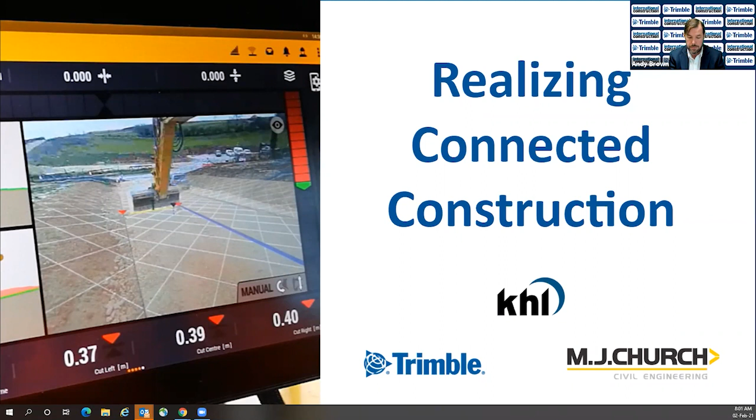Great. Thanks, Cam. And we also have Sam Williams, who's an engineering surveyor for MJ Church. They're a contractor based in the UK, and they've set out to transform civil workflows with technologies to connect the office with the work in the field. Sam, thank you for your time. Are you well? I'm well, thank you, Andy. Thank you very much for having us here. Really keen to share our knowledge.

Great. Well, thank you. We're very lucky to have two very good speakers, and we do have a presentation which we will run through. But before that, I've just got a couple of quick questions for Cameron and for Sam. So my first question is for Cam. We're going to be talking about different technologies today, but one of the main ones is machine control. There'll be people watching this webinar at different technical knowledge levels, so could you give us a quick definition of machine control and perhaps how it's evolved over the last few years?

Yeah, sure. It's quite important to do so because a lot of people are not exposed to machine control and they don't know what it is. So at the simplest form, machine control uses various sensing and positioning sensors and a display to provide the operator in the machine with a reference from where, say, the bucket or the blade is to a target grade. And that target grade could be a 3D model or a design, or it could be as simple as a distance from the bucket or blade to a known bench point or hub, or it could be a distance

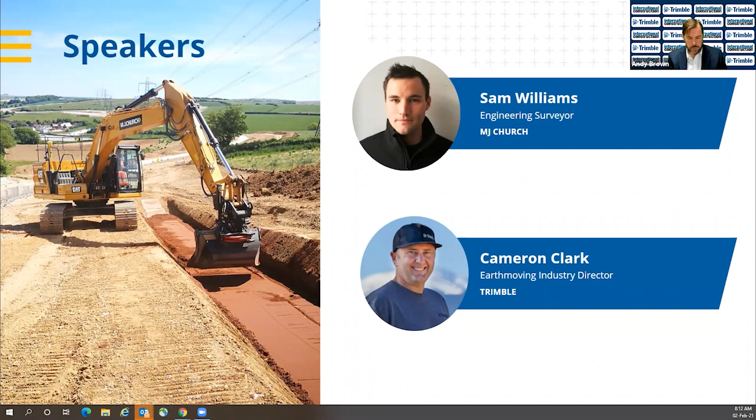Okay, that's really interesting. Thank you. Okay, so I'll hand over to you now, Cam, quickly. I know you've got some slides to go through. Yeah, sure. So yeah, welcome again, everybody.

I wanted to start this session off by acknowledging some of the key fundamental changes in construction that we've seen over the last 20 plus years. We've seen a great continuous improvement process from stakes and string lines, having to eyeball between the stakes. Then lasers came along and you didn't need to eyeball anymore. We've gone from indicate guidance to automatics, being able to do automatics off lasers and trace automatics off a string line or an existing pass.

Then we've gone to 3D where you don't need stakes anymore. You don't have to worry about machines running them over, and you can get guidance wherever you are. You've got all the information in the machine and we can control the machine to complex surfaces. But we've also seen the connection between the office and the field.

And we've gone from really hard to set up radio networks, I mean crazy hard, just to do simple things like file transfer. I remember years ago, 15 plus years, doing FTP file transfer off a command line, just testing, and the pain it was to set things up. But now we've got a lot better connectivity.

We've gone from no cell phone coverage to very patchy to things now being easier, quicker, with more reliable solutions. Some areas are still bad, but when you look at how far it's come, it's dramatically changed over the decades. This has really enabled the construction industry to leverage site connectivity for the flow of information and to strive to improve efficiency and productivity while minimizing waste and cost at every stage of the project.

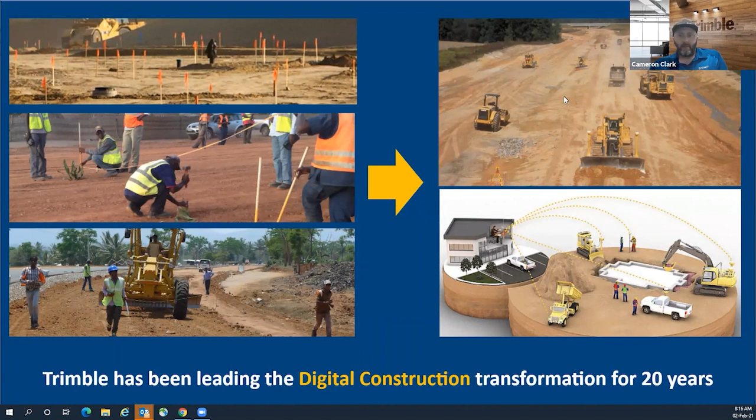Okay, well, I'll jump to the next slide if that's good, Andy. So touching on your question as well, even with the major developments and what I showed earlier, the construction industry isn't achieving the possible gains. And with that, costs are up nearly 5%. That was reported in 2019 in the US. And they're steadily increasing due to labor shortages, as well as the increasing price of materials. And in the construction industry, we've failed to see some of these technologies being adopted like in other industries, primarily driven by some of those mindset changes that I've talked about.

And when you look at it, about 30% of work performed in construction is rework. This can be caused by factors like lack of supervision, insufficient information, limited resources, failed communication, and one that we're going to touch on a lot today is disjointed activities, where the same data or models are not used throughout the job, and these drive an immense cost.

As well, in the US alone, with the 2008 financial crisis, about 1.5 million jobs were lost in construction, and a lot of these never returned. When you compound that with an aging workforce that's retiring, as well as a lack of a holistic apprenticeship program, there's a brain drain that's really hard to recover from. So it's not only a supply and demand issue, but it's also forcing increased labor wages that risk project profitability. But it's not all doom and gloom, and today we want to highlight how things can change and come together when we connect these workflows, and you as a contractor can really realize these in connected construction.

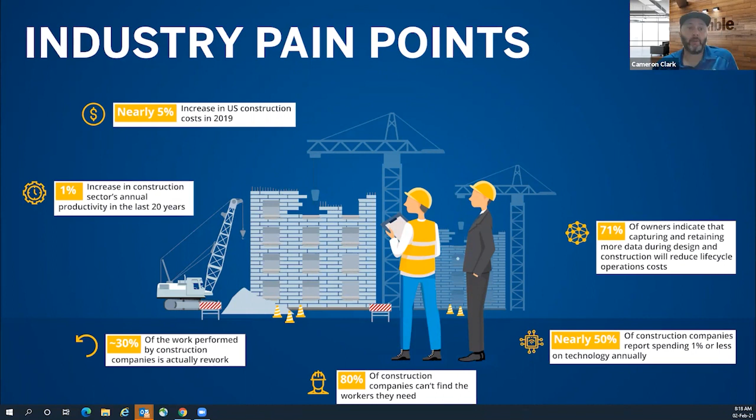And how often have you heard of contractors coming into a job and finding something's wrong? A lot of times they're finding it once they actually start cutting dirt or moving material. Maybe the elevation's wrong or the utilities are in the way. Sometimes you can start and do a workaround. Other times you're stuck and you've got to wait for a design change. But if you can visualize data and all aspects of the project beforehand, using the same models and data, your ability to change is very high, quickly and easily, with as minimal cost as you can.

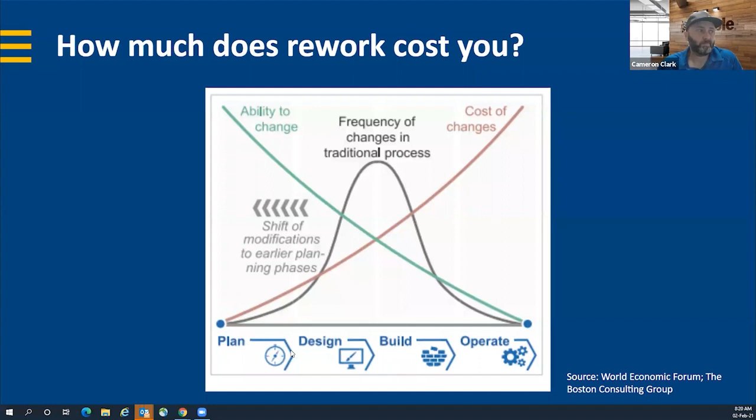So when you look at Trimble and how we've evolved, we've gone from point solutions focusing on areas of GPS, then other positioning sources, to dramatically improve productivity. But the key area of focus now is integrated work processes. It's an ecosystem solution for the whole value chain or life cycle. Our mission is to transform the way the world works, and our vision is to connect the digital and the physical worlds, in order to allow customers to deliver with confidence.

So to do this, you need to connect all the processes and task management through all the different personas on the construction site and through the whole chain, as well as both the vertical and horizontal civil construction processes. And this really drives quality, productivity, transparency, safety, and sustainability.

And Trimble is unique where we offer solutions that integrate throughout the whole construction life cycle. Couple that with the support of our construction technology distributor network of SITECH, and we've got your needs covered. And really today we wanted to highlight with Sam from MJ Church, and he's going to go into specifics about the value that they see with connected construction and how they realize this value.

And Sam will be touching on real life examples for the model creation, design, management, and office to field workflows, remote monitoring, support, and training, and then also the real-time capture of field data and the benefits of that data coming back to the office automatically. And then also not having to send surveyors out to do as-builts, being able to do stuff like that with the machines directly and from information that they can capture.

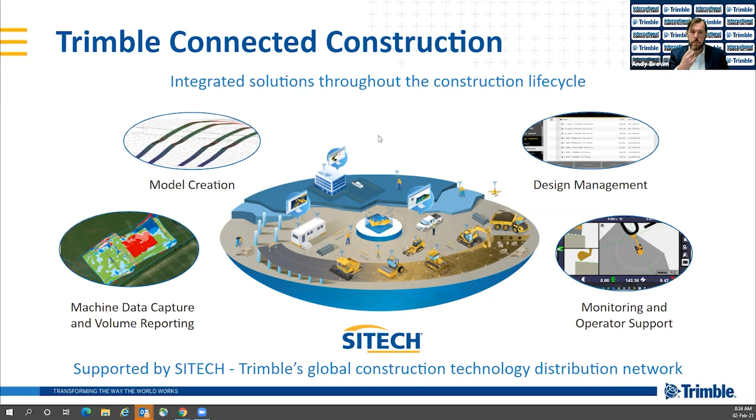Okay, do you want to go into the next slide? Yep. Can do. So this is where I jump in and give a real world experience of what I think is fair to say is sort of realizing Trimble's vision. I think one of our goals as a team from the beginning was to, as much as practical, realize the vision of a connected site and all the technologies that encompasses, and to see what we can do with it, really. Being interested in technology, it's always fascinating to see how we can use things in a different way, or try and use our existing equipment in a more optimized workflow.

So I've tried to frame this presentation around one of our example projects. It's acting as sort of a proving ground of all of this machine control technology and this fully connected real life site. The lessons we've learned there and the knowledge that we've gained there, now a year and a half on, are trickling down into all of our other sites across the country, really. And the technology that we've developed here will be moving forward into all of our future projects as best we can. We're investing heavily still in machine control and the technology that comes along with it.

So the Dorset Visual Impact Provision is a project in the southwest of England, in the United Kingdom. MJ Church are working on behalf of Morgan Sindall and National Grid.

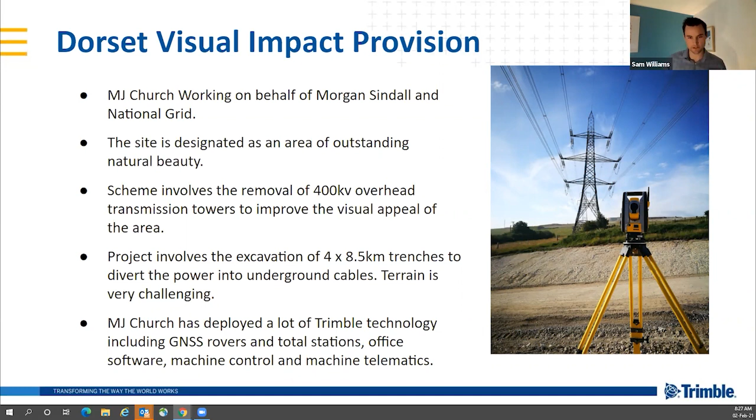So 3D model creation, this is what saps quite a bit of my time, but it's one of the areas that I'm particularly interested in and have become fairly skilled in over the years. So we use Trimble Business Center, which, if you do nothing else after this webinar, go away and just look at how you might want to use it or get a trial of it, because it is, for me, the one-stop shop of modeling softwares. There's not much it can't do. It does some amazing stuff, and they're constantly improving it. Instead of having a fragmented approach, which you might find with other providers, pretty much everything is bolted into the one suite. There's little add-ons here and there, depending on your workflow. But it is an amazing tool.

So the designer on this particular project has provided us with fairly limited 2D detail, which isn't particularly useful when you've got a machine control fleet that needs a 3D model to dig to. So they provided us this information in a variety of different formats, PDFs, 2D DXFs, all sorts of other industry formats. TBC can import all of that data, we can manipulate it, we can elevate 2D data to 3D, and do all sorts of modeling on it, and then push that to the field for construction. So on this particular project, we've been using Trimble Business Center to create corridor models effectively.

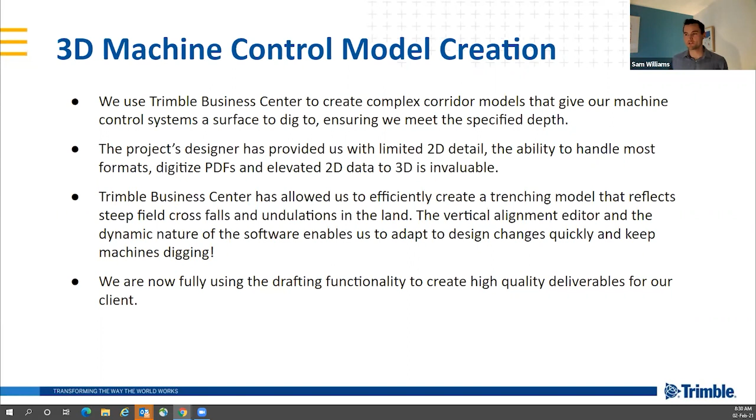And we can use powerful cut fill maps to optimize the levels as much as possible to get us into where we need to be in terms of the depth. And then once we've done that optimization, we can put together some high quality PDF deliverables to send to our client for approval or for design review purposes.

And the tools that are in here have already highlighted a number of issues before we got there. It was by doing this analysis or the design on a couple of the first sections that we identified a major issue between field transitions. That realization was then fed back to the design team, who have since redesigned much of the scheme to reflect the new topographical data. That realization came first within TBC.

If we could just skip to the next one, please, Cam.

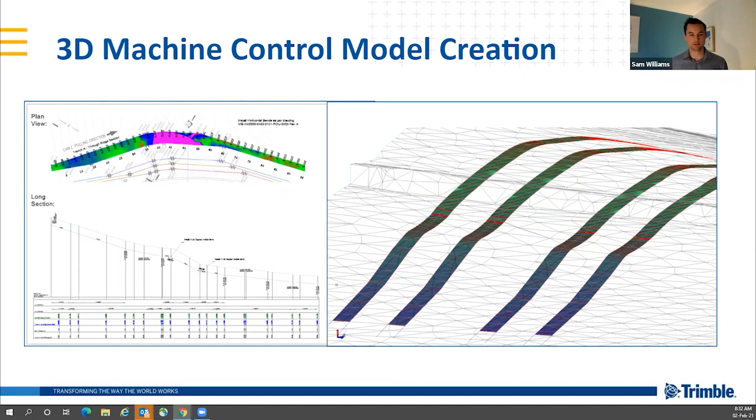So once we've created these designs in Trimble Business Centre, once they've been approved and the project team are happy with them, and I'm happy that they've met the design specification, we need to push that data to the field. Now, traditionally that's done with a USB stick.

So you plug a USB stick into your laptop, you drive down the M5 2 hours south from here, and then you run between machines for the day, you stick the USB in and you download it, and then you run through all 10 machines or 8 machines that are down there, and then you drive back up and you get a phone call and the design needs to change. For whatever reason, they've encountered a service or something's changed, and then the process starts all over again, drive back down. Obviously a complete waste of everyone's time.

So we use a cloud-based management solution called Trimble Connected Community, or soon to be Works Manager for us. Now this is live on the internet. I can push designs directly from Trimble Business Centre to the cloud. Those designs are then pushed to the field, to every machine we have in the field with a SIM card that's on 4G network. They can be there within 15 minutes.

The machines probe the server every 15 minutes to see if anything's changed. The driver, if they want to, can initiate a manual sync. So it's almost instant. It's as fast as the cell network can deliver that data. So if we encounter a service or if there's a design change, I can very quickly react to changes or requests for changes, push that data to the field, and I can know from the comfort and safety of the office that every machine on that site will be updated with the latest data.

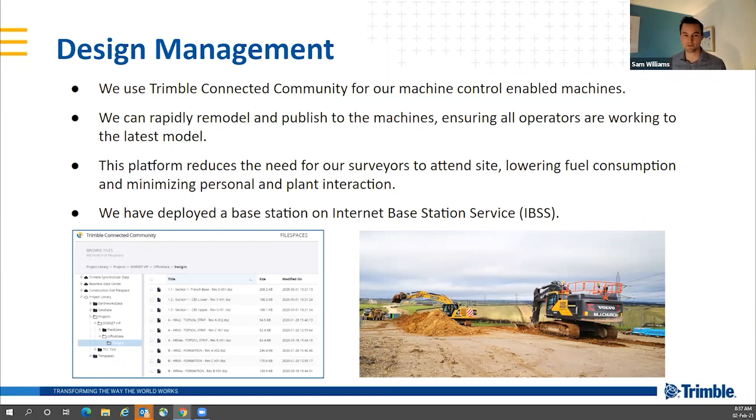So yeah, just to finish up on this slide, pretty much as a business now, all of our next generation machine control systems come enabled with a SIM card. So we remotely monitor them and we can remotely manage them from wherever we are in the country, which is a massive game changer for us, really. If we could just jump to the next slide, Cam, please.

So on this note, monitoring and operator support, because all the machines are on the internet now, we can remotely log in from anywhere, view a live screen of the operator, and we can see diagnostics on those particular machines. We can dial in and support the operator to work in a new, different way. I often get phone calls saying, how do I do this? Or I want to do this. And I can quickly dial in, and instead of spending half an hour trying to describe a menu over the phone, I can very quickly see the menu and say, okay, click that, click that, click that. And then that's solved very quickly, and they can start using technology in a different or more innovative way.

Okay, Sam, sorry, just before we jump on, I'll just jump in quickly. I'm just curious to know what's your experience with the operators themselves? Obviously each operator is going to be different and have different levels of expertise. I get that, but on average, how long does it take them to get up to speed with using this, and have you had any particular feedback from them that might be a little bit surprising?

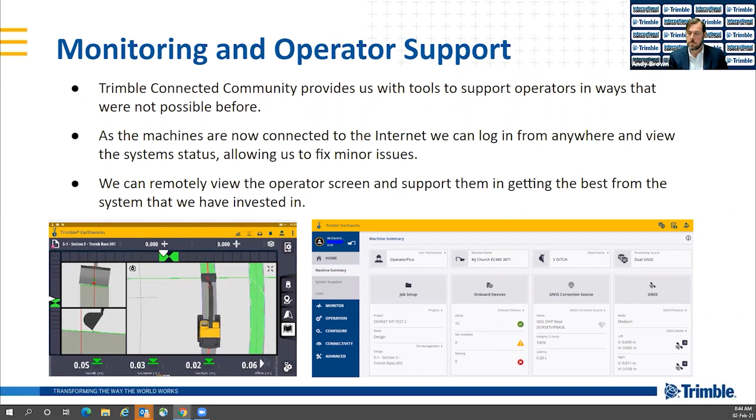So the last bit I need to touch on, really, second to last bit: we've taken the design data, we've created a 3D model in Business Center, we've issued that model to the cloud. It's been downloaded from the cloud by the machines. The operators have started to work to that model. And now we need to try and close the loop back to the office to realize our connected construction.

So we were quite clear at the beginning of this project, we wanted to use machine telematics and live machine data capture, which not many contractors in the UK have trialed or used yet. I think it is fair to say that we've really taken this technology and we're trying to push it and see what we can do with it. It's a bit of a learning curve, but I think we've got quite far with it now. And like I said at the start of the presentation, the lessons we've learned on this site are now trickling down into other sites. And we will be using this technology moving forward in quarries, landfills, and all sorts of other little jobs that we pick up along the way.

So machine telematics, for those that are unfamiliar: we can turn the blade or the bucket of that machine into a surveyor. So the machine, as it's grading to that surface, or as it's stripping topsoil or stripping overburden, because the update rate is so high, it's constantly tracking the tip of that attachment, the bucket. And it generates a dense point cloud effectively. We get a point every 300 mil. And that data is uploaded constantly to a cloud-based platform.

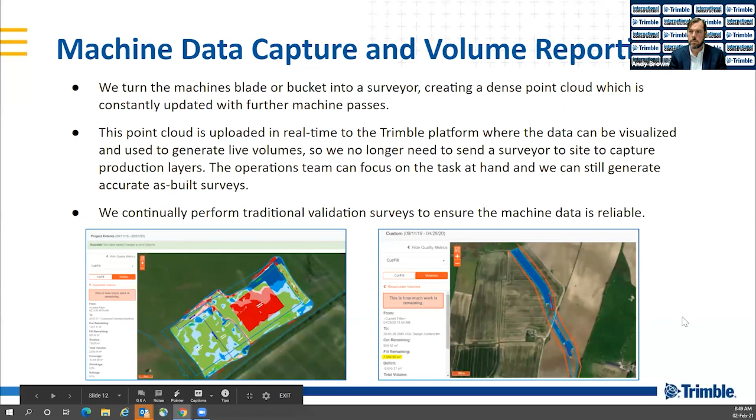So we've got this cloud-based platform for viewing the machine telematic data, and we can compare that against design surfaces, and that's exactly what I've done in this image on the left here. This is live data from a machine, and I can compare it to a design and get a live cut fill map for the entire job, showing us that we are achieving the grade within the specification, which is valuable and really useful. But we want to go one step further and completely close that circle back to the office, so we can download point cloud from this platform.

And then, like any other point cloud you collect, whether it be with a terrestrial laser scanner or with a UAV, there's an element of cleanup that is required to get that point cloud into the quality that we need it to. So I can go in manually using Trimble Business Center and chop out peaks and troughs and clear machine crud that's caused by various little issues, only minor. And then I can process that point cloud. I can add break lines and feature lines and add text and annotation.

And then to close the loop completely, I can run high quality as-built deliverables, so PDFs and comparisons between design surfaces and what we've built in the field, which can be delivered back to our client, thus proving that we have met the specification. So we took the specification, we designed, we issued to the machine, we constructed, we monitored using the cloud-based platform, and then we downloaded that data and compared it back to the design that we had approved in the first place. So we completely closed that circle.

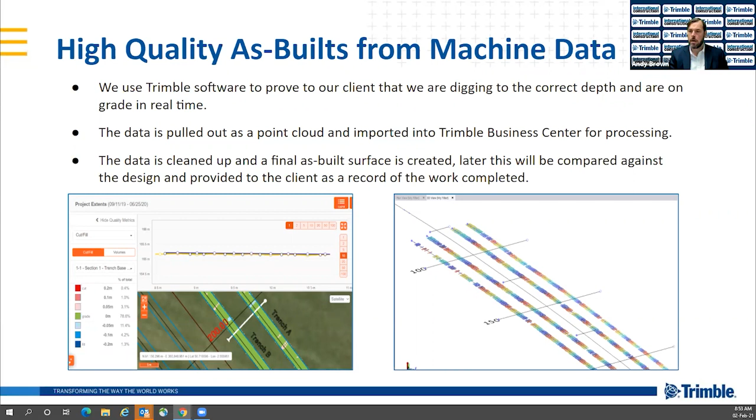One of which is from Antonis Simonis from Cyprus, and he asks, is it possible to fit Trimble technology to existing machines? How easy is it? And broadly and quickly, what does it involve? That's a very good question, and depending on what the machine is, how old the machine is, or the manufacturer, it will depend. But Trimble, I mentioned earlier in the slides, what we call Trimble Ready. So we've got specific brackets and stuff designed for specific machines.

And in some cases, some machines might already have certain parts that are needed on the machine that we can connect to. So in the aftermarket through Sitech, we put things on machines that you already have. So if you want grade control, you don't need to buy a brand new machine. But depending on what the machine is, it might be more suited for certain things. Now, if it's a newer machine that's got electrohydraulics, then we can automate the blade, etc., without having to install valves and other stuff.

But we do offer kits, and we can install hydraulics and valves to a machine. But yeah, it really depends on what machine it is. But yes, definitely, there's options out there. It's not too bad. Depending on what it is, it might take longer. But definitely check it out and talk to Sitech or your other dealers, and there's most likely a solution there waiting for you to give it a go.